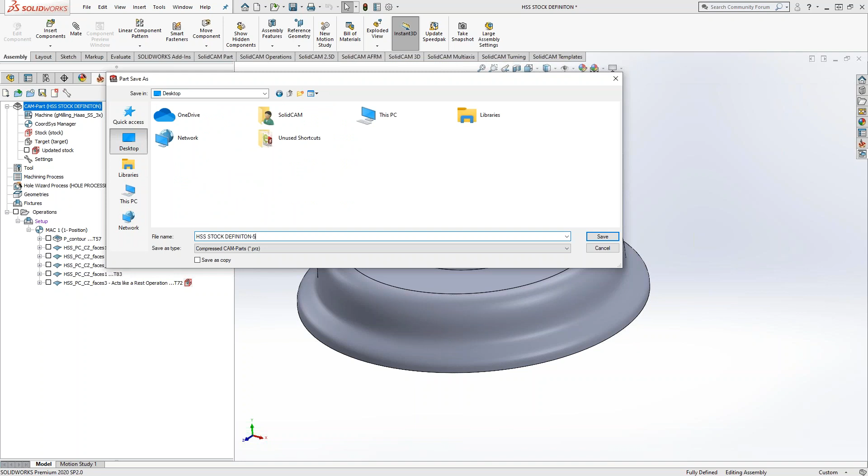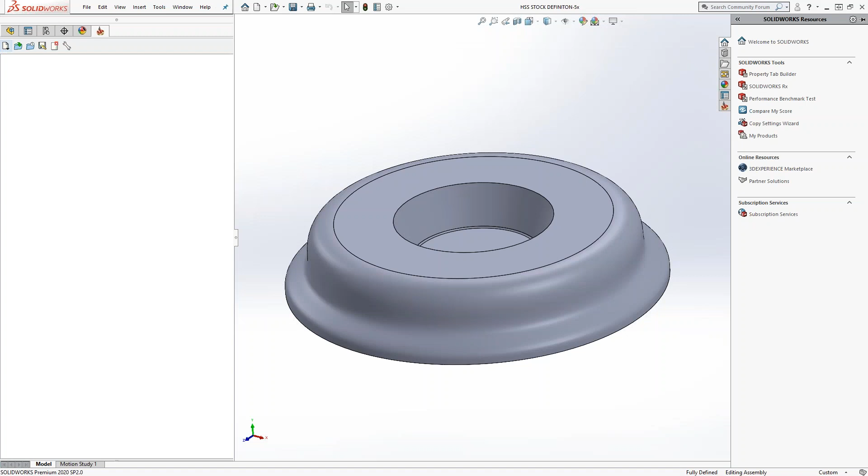So this is the one that we're going to put on the 5-axis machine. So this will close this original one. It's working its way on it, but it should be closing the original one and opening it as, in this case, HSS stock definition -5x. We'll see that on the top of the screen. But this is the same file, essentially, just renamed. So the same CAD cam part model reference, the same toolpath, same tool table, even the same stock as you see there. But it does have the new name.

Now, what we'll do is first, we'll change the post. So double click on cam part. And let's change it to a 5-axis post. I think we've got one of the basic ones that come with the software, the Haas 5x. Now, when you change post, even if it's not from 3-axis to 5-axis, you're always going to get this message saying you're basically changing the references of everything. This post is going to have some different functionality. So do you want to save a copy of your original one, or do you want to just continue?

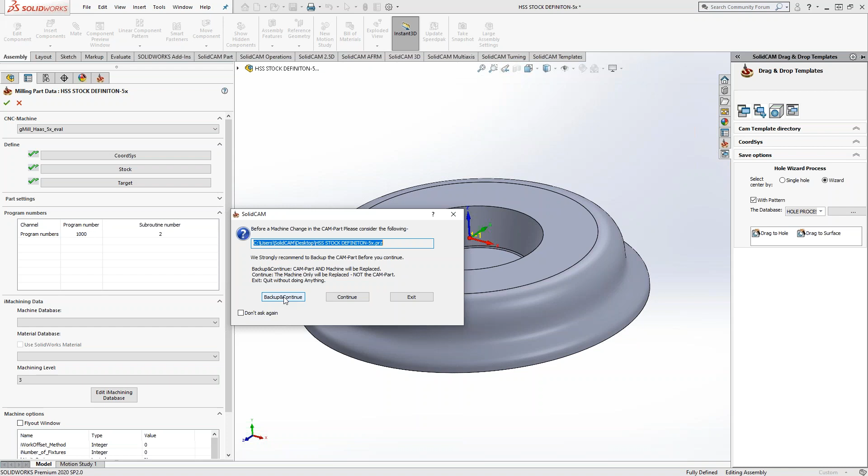Now, this is a copy of that original file, so I'm okay to say continue. I'm just going to change this post in this one file, and the 3-axis one stayed the same, so we don't have to worry about that. And then it just shows you what's different. I'll just say okay, and there we go.

Now, when you change the post, remember that there's two files there. There's the GPP and the VMID, and the VMID is the definition of the limits of your machine. So if we're working on a completely different machine, you might need to change your iMachining definitions. So keep that in mind as well. But in this case, we're not using iMachining.

So save as, and if I want to keep the same work done by the 3-axis operations there, but I don't want to actually have to repost them every time, what I can do is I can suppress them. But remember from what we said last week, when you suppress something, you're actually removing it from consideration. So if we still want to update the stock, we just don't want to G-code it.

There's actually, right below suppress, something that says suppress G-code. And essentially, if you take a look at it, you get these boxes around your toolpaths there. I can't actually G-code them. G-code is grayed out, but it does still update the stock. So I can still see the updated stock there.

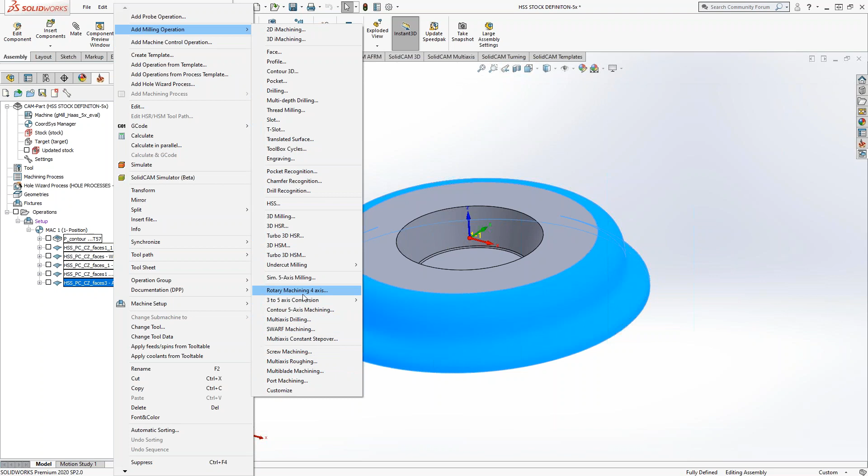So this is almost like stage 2 in the part production life. It was on a 3-axis machine. We're bringing over that stock. We're bringing over these toolpaths. We're just not doing them over again. This is another way to retain that stock definition when you go from one machine to another. And then from there, you can add your 5-axis toolpaths. You can see they're all open now that I've chosen a 5-axis post.

But let's say I wasn't ready to do that, or I've made something on the part and I don't want to save it. There is actually a way to close out of the file without saving. You can basically right-click, and instead of just close, added now, and I believe it's 2020, is close without save. So close without save is still a way to properly close the file. It's not going to get stuck in the temporary folder like it usually does when you click the X in the top right corner, but it is a way to close it without saving the most recent change. And that's actually new in 2020.

Yeah, and anytime you guys close out of a part, you save and calculate something, everything is getting written to that temporary folder. And now if you do have a whoops in there, instead of going into your task manager and killing the program so it doesn't save, you do it that exact way that Mark was just showing you guys.

Yep. Now it's still saving up to the point of when you open up the file. So it's not like you can save at a certain point and then close and not save the most recent change. Correct me if I'm wrong, Kevin, but I think it's basically you're closing it properly without saving, but it only saves to the point before you opened it up. Correct. Yeah, so there's still that drawback of the whole temporary folder versus compressed folder issue, but at least this way you're not crashing it, you're not causing it to stay stuck in the temporary folder, which can lead to issues.

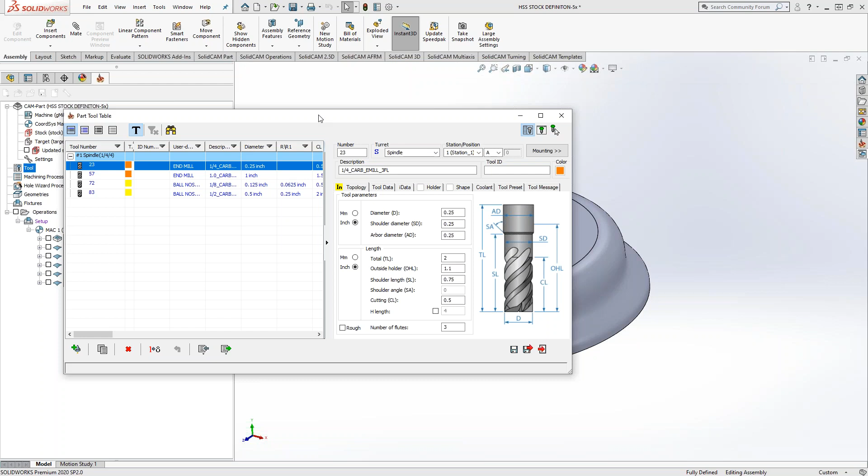Okay, one of the other questions that was left over was, what is synchronize and what is break associativity? And I think that question was relating to this submenu here. So you have check synchronization, synchronize and calculate, and break associativity. Real simple, this is the idea that every toolpath you program is tied into a piece of geometry, and that piece of geometry is tied into an ID number or some sort of identification from SOLIDWORKS.

So the way the associativity works is in the original part file you got from SOLIDWORKS, every face, every edge has an ID number. And that ID number is what we refer to when we select the geometries inside SolidCAM. So if there's a change on the SOLIDWORKS side, that change gets incorporated into the SolidCAM side of things, into your CAM part model, and then your toolpath will update to the new version of that geometry. It's a larger hole or a different hole location, whatever the change was. So that's associativity.

Let's say, though, that this is a Rev 1, and now you have a Rev 2, but you don't want to overwrite your Rev 1. Well, just like we saw with the Save As, you can make a Save As version of your file, and then in that Save As version, click on Break Associativity.

That way, all the toolpaths, all the geometry, the design model itself has now broken associativity. It will now not update versus the new version of the file in SOLIDWORKS. So it's the opposite of what you're trying to do with some of this integration. You've got a Rev 1, you don't want it to update, you want it to stay Rev 1 forever. Click on Break Associativity, and that toolpath will never update when it sees an update on the SolidWorks side. It actually won't even bother to check anymore.

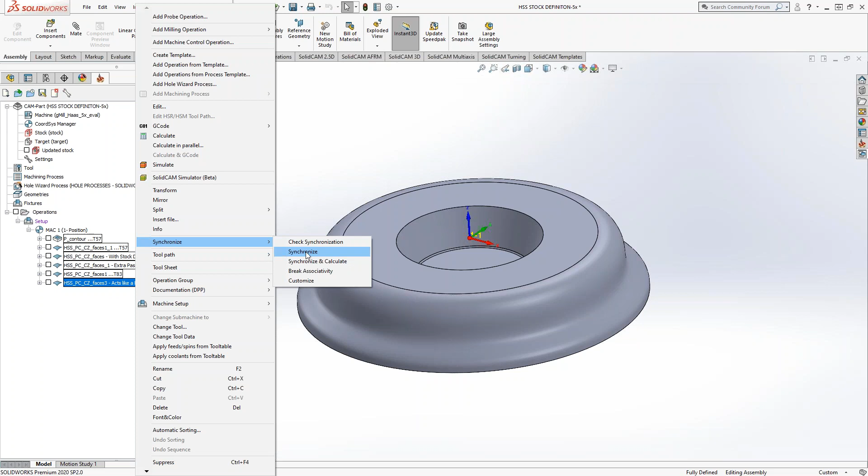And since we're kind of on the check synchronization and synchronize, you can also do this with your target and your stock models as well. You can do a check synchronization and synchronize too. So depending on how you have your settings, if you have your synchronization settings to user demand, and Mark goes and makes a change in here, we basically want to go and just do a check synchronization real quick.

And the check synchronization on user demand most of the time will pop up with the stoplights on the stock or the target or the operation that needs to be synchronized. So it's just letting you know what has changed. But in a very rare instance, they may not pop up for your stock and your target if you make a change. And that's only if you're making the change inside of the SolidCAM model itself.

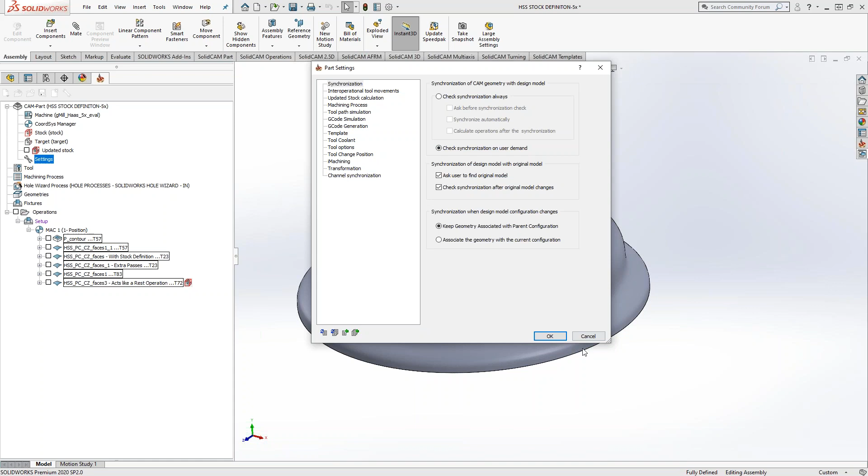So if Mark went into the SolidCAM tab and made a change to the model instead of just SolidWorks alone, sometimes it just takes a little bit longer to synchronize that. If Mark wanted to see that change instantly and update his target and his stock to go with that new change, he can come up to the top and do check synchronization and do the synchronize right there as well.

And if anything is out of sync, it will pop up with the stoplight, or I guess it's not really a stoplight, but it's a red-green. You want to show them that icon at the top, Mark? The SolidWorks stop. Oh yeah, it looks like that. It will look just like that for you. It's the same icon, but it'll be overlapping your icons over here. So any one of these toolpaths that has geometry that needs to be resynchronized, or if your stock and target need to be resynchronized, it's a very similar symbol that just overlaps that symbol there.

And very similar to what we talked about last week, Kevin was talking about if you hit this plus sign, it actually shows you what needs to be resynchronized. So let's say in this HSS toolpath, it was only whatever faces were selected under faces 2 that need to be resynchronized. With this collapsed, I would see the stoplight symbol right next to that HSS symbol. But if I click on the plus sign, I would see the HSS faces selection there with the stoplight symbol indicating that's the thing that needs to be resynchronized. And when you expand it, you can right click on it and do the check synchronization and synchronize as well.

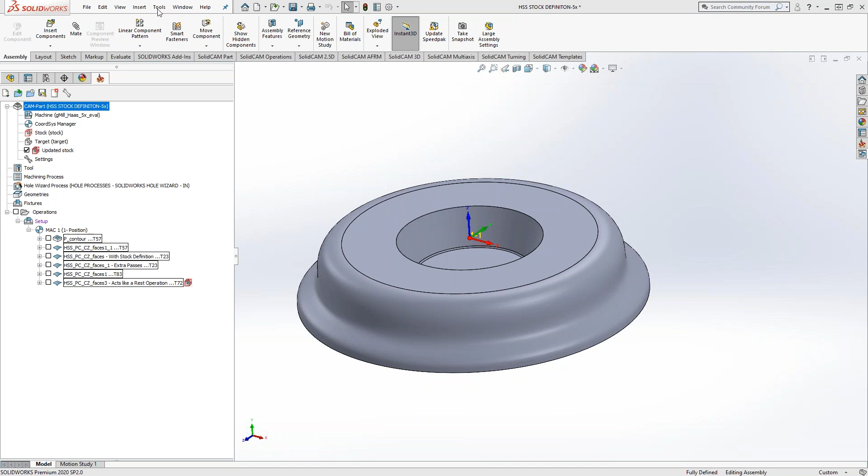But so basically, Frank's question is he's got a cylinder with a flat on it. And because of some of the things that SolidCAM does, some of the things that are just kind of generic for CAM programming in general, there was something that was overcutting on his part. Basically, he's got a part that's probably not this one, but it's very similar: basically just a square shape or a couple of flats or even a hex on a cylinder or a bar stock.

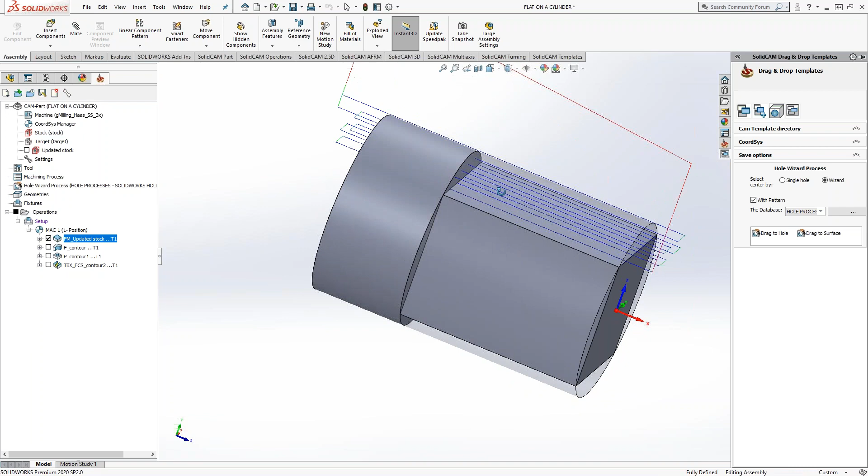And if you use the facing operation, remember that facing considers whatever surface you click on as the top face of the part. Basically, it's open on all sides. It's almost like a pocket that's open on all sides. So if you use the facing operation, it's going to think that you want to machine all that stock. And that's why it's crashing into the back there.

So I would not use face. I would not even use face if you don't even have a back end, but you don't want to cross this back line here, because again, facing considers all edges to be open. That's why there isn't really an option to set an open edge versus a closed edge inside facing. So what you would do with this is you can use either the profile operation, the pocketing operation, or there is actually a toolbox cycle specific to flat on a cylinder. So let's go through each one and see how you can use it.

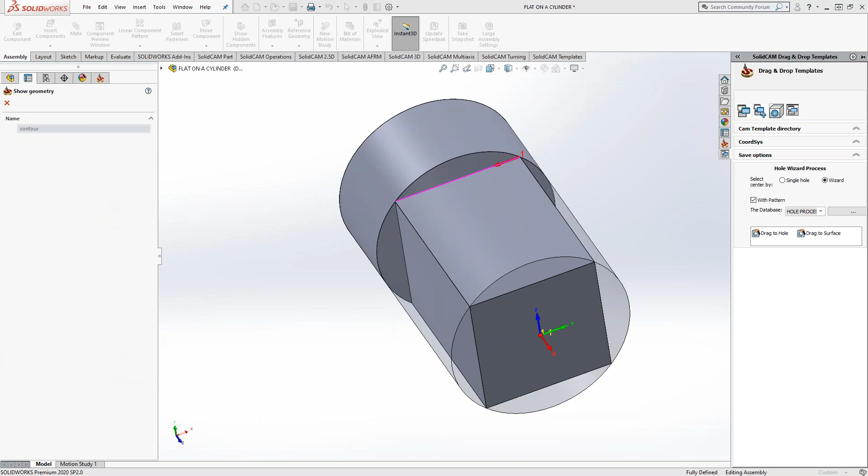So in terms of the profile operation, what I've chosen is just that back line. Now that back line on this part just happens to be right on the edges of that cylinder, but it could also be the flat on a hex that is a little more inside the cylinder. It really doesn't matter, because in the profile toolpath, you have the ability to do extensions. So if this thing was not right at the edge of the stock and I should have extended it a little bit more, always remember that you can do an extension inside of this window here. And that can be found in the technology section, geometry button. But in this case, this chain is right on the edges, so I don't have to do any extensions.

The tool, in this case, I've chosen a 1/2" end mill. Levels, because of the stock recognition, or even just if I just chose it, I can do top of target, top of stock, and then the same with this one. I actually clicked on that top face and got that associativity. So again, a level of associativity just by clicking on the geometry. If I wanted to break associativity, I could just type in the number. But it basically means the same thing in this file. It's just that the associativity would follow that face.

So if I change the shape of the square or the shape of my stock or anything like that, the associativity will follow that face, versus if I put that number in there, it'll always go to, in this case, 290 thou below whatever I've chosen as my upper level. So that's just another level of associativity there. But basically what I'm showing you here is in the profile toolpath, you have the ability to go from the top of stock or top of target down to whatever face.

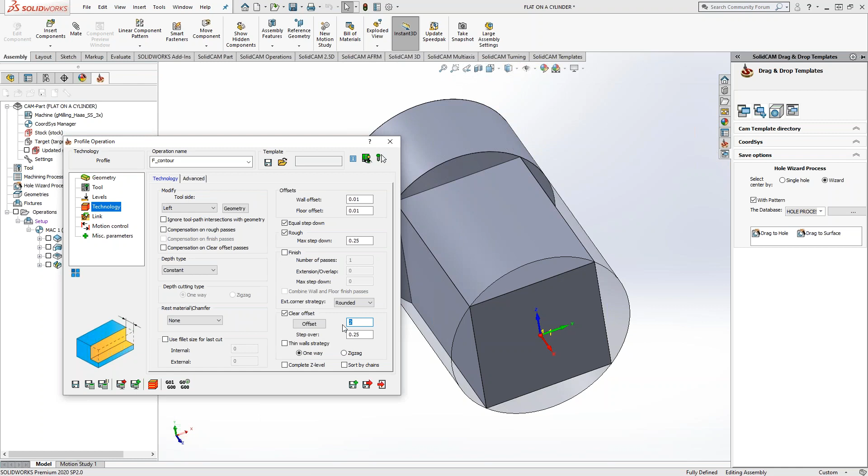So to set that, I chose offset and I chose this face. It's recording these coordinates, but really what it's doing is finding the distance between my chain and that point. So that's the 2 inches that this thing is, right? And then here's my step over. So similar to what you do in pocketing or similar to what you do in HSS, anytime you have a step over, a radial step over, that's this value here, and then this is the travel across there.

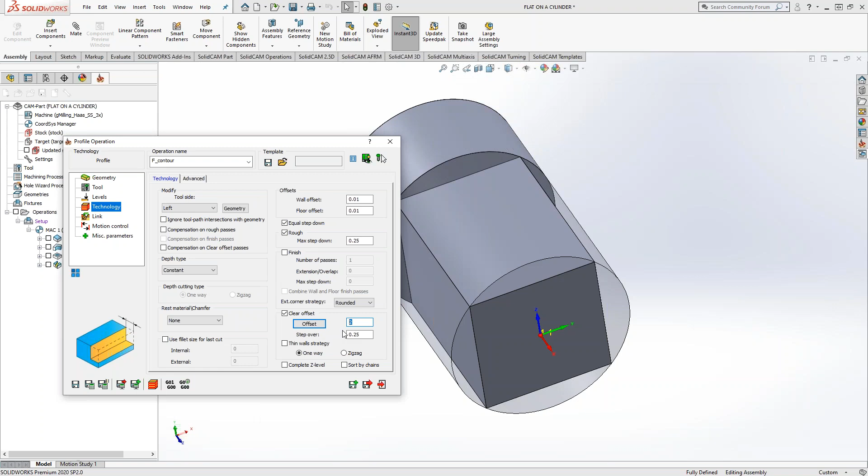So there's nothing associative about this. There's nothing pocketing related about this. This is simply, here's how much material I have to travel across, and here's the steps across it. And what that does is it generates a toolpath that looks like this. So it's still a profile toolpath. It's going to do one path, retract, reposition to do the next path because I told it to do it one way. But you can see I've got my depths of cut.

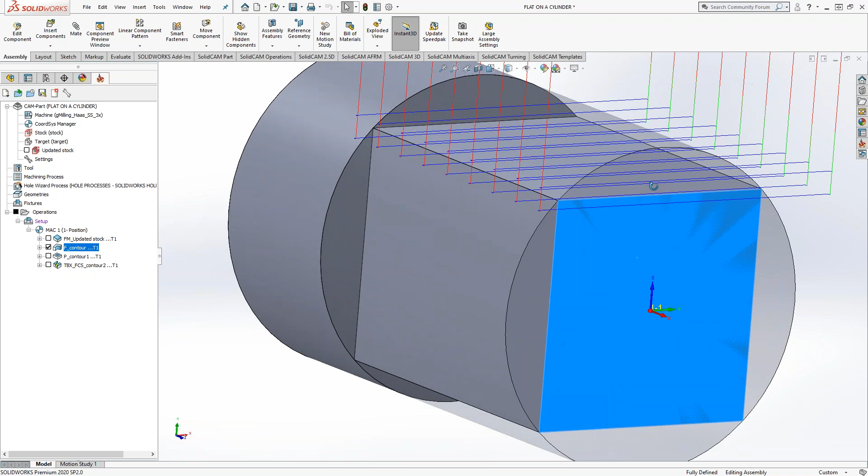Let me just get a front view of this thing. I've got my depths of cut and I've got my step overs, and that does all of that. And because I chose this back wall, this line here as my wall, it's going to go up to that point and that's it. So I don't have to worry about colliding or over traveling or anything like that. So that's one way to do it.

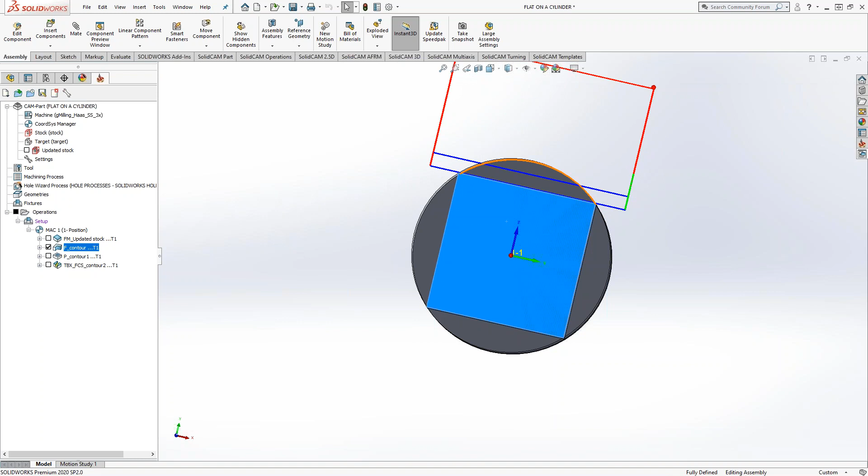The drawback of that though is you can see that it's not paying attention to the fact that there's curvature there. So it's actually cutting the air over here, because that curvature means there's not that much material versus down there. So I want to trim that a little bit. So I'm going to jump right to the toolbox cycle because you program it exactly the same way. So if we take a look, my geometry is that back line. I got to that because I used flat on a cylinder, which is one of the toolbox cycles. My tool is the same, my levels exactly the same, top of target down to that face.

In the technology section, for a flat on a cylinder, I'm doing the exact same thing. I'm giving it my clear offset, how much I'd like to step over. I'm giving it my step down. It's going to generate it very similar to a profile toolpath, but in this case, I can tell it to go along or across, depending on how I'd like to go across that surface. Wall offset, floor offset, extension, because it kind of imagines I probably want to go off the cylinder a little bit. This is where you can actually do that extension very similar to what we saw in profile. I can tell it to go a little off the sides if I need to, because maybe that one line doesn't represent the entire flat.

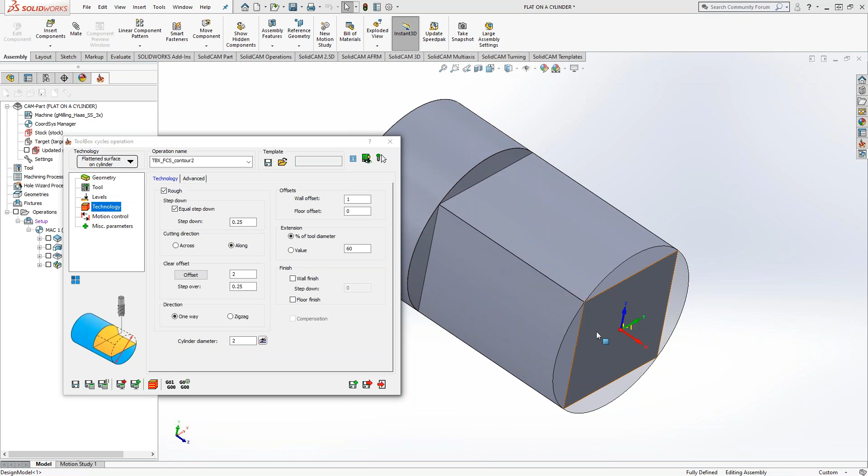But dissimilar from that is the fact that it now can recognize that it's on a cylinder. So I can actually give it the diameter of that cylinder. So it'll recognize for my levels where on the cylinder this thing is sitting, so that when I take it from the front view, it actually trims it a little bit. I'm not sure if you can see that there.

How do you get to the toolbox cycles? If you right click and go to add milling operation, toolbox cycles is right there. If you go from your menus up here, I believe it is 2.5D? Yep, so toolbox cycles. If you go to the 2.5D tab, it is over here. So it's just another one of the operations in the list. But basically, the toolbox cycles are bare bones versions of Pocket and Profile. So you'll get it for certain features.

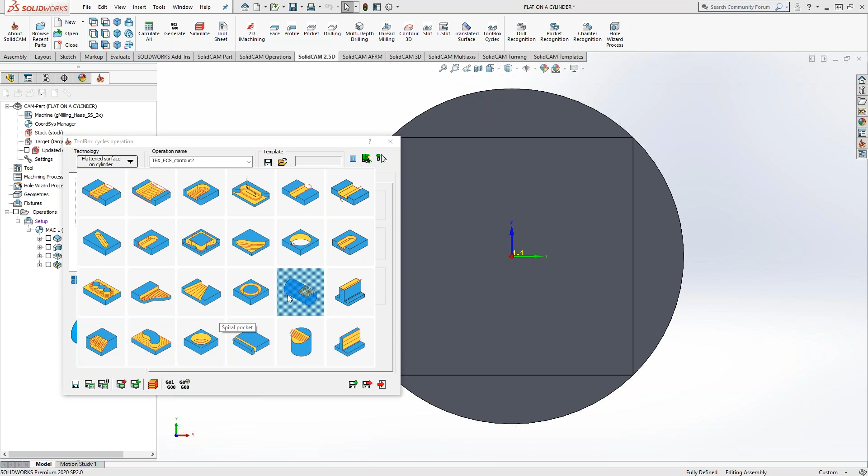If we just open up this toolbox cycle once again, anything that is very similar to what you see in these images, you can do a very bare bones, very minimal parameter selection for some of these. And a lot of these are very unique, but the flat on cylinder is one that I find a lot of people who don't have a 3D toolpath will use, because this is a really great way to get a trimmed, almost 3D-like toolpath when you don't even have the 3D package.

Yeah, and there's a lot of very powerful tools in there too, and maybe sometime we can go over all those Toolbox Cycles, because like Frank and probably a lot of you guys in here, you guys have never seen the Toolbox Cycles before. So a lot of powerful tools in there that really simplifies things for you.

Well, I would say if they've been watching the videos, they will have seen Toolbox Cycles, because there's been at least 2 or 3 Kev cams on there. So definitely it's something that has been seen.

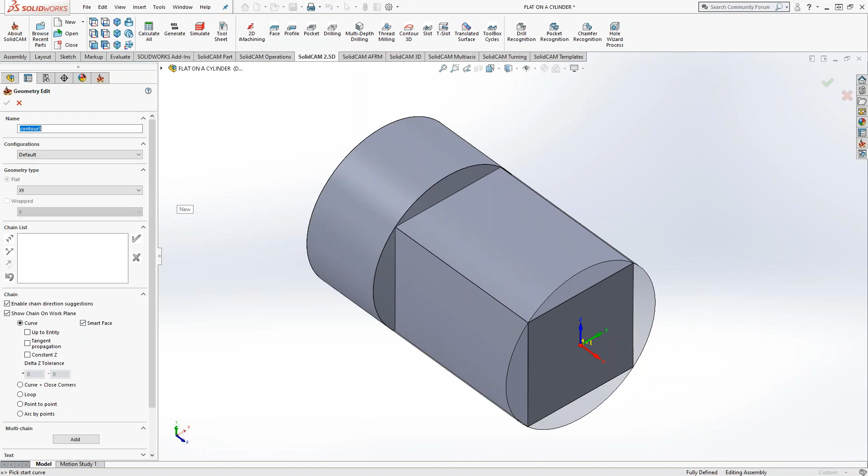Okay, and then if you don't use Profile, you don't use Toolbox Cycles, you can still use Pocket as well. Because again, if you consider this to be a pocket that's open on all 3 sides, when I click New, I can use my smart face. I can click on that face there, and it gives me a pocket that has 1 wall and 3 sides.

And then from there, you're doing the exact same thing. You're choosing your tool, your levels, your technology. In this case, I have it set to contour, open pocket, approach from outside. We get a toolpath that looks like this.

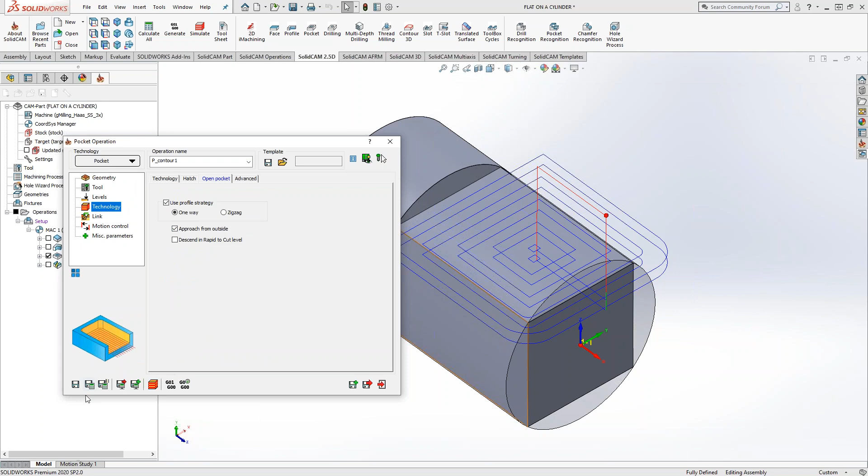If you want it to look almost the same as what we did with the profile, then I can switch this to hatch. I can get it to be, let's say, 90 degrees to the x-axis. And we can use profile style strategy. And then we get something that's exactly the same. Now, this versus just regular profile, the difference is I've defined the shape of my pocket.

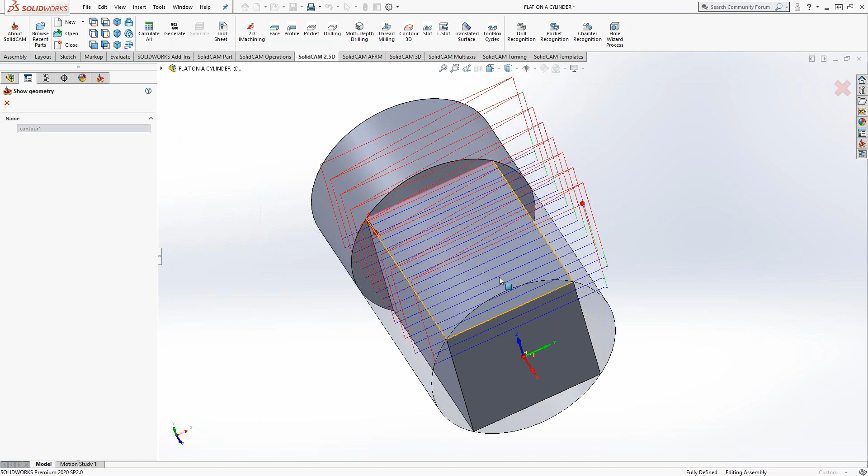And there's actually a tip and trick video on the YouTube channel for this as well. If I didn't have a nice clear offset where the chain was the same on both ends, if I had maybe some sort of triangular shape or anything like that, then the pocket toolpath using the profile style actually trims the toolpath in this direction. So if we had a unique shape like this, the pocket would dictate the travel of the tool as well. So it would actually trim it in the XY plane.

But with pocketing, you get the same issue as we had with profile. It's not trimming it to the curvature of the cylinder.

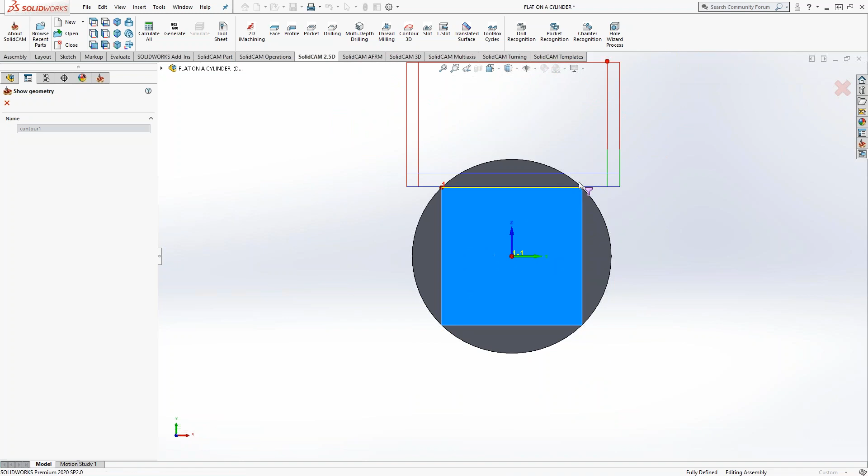Now, we could take it one step even further, since we were just talking about this on Friday, in HSS, the stock definition as well. You could set it up as an HSS operation. We could do that as well, yeah. Now, HSS, I wouldn't usually use it for roughing like we talked about on Friday, but Kevin's right. We could do the exact same thing.

So let's say we do parallel cuts linear. As my drive surface, it's that guy right there. I always set this to this option here so we can use the tool as much as possible on that surface. The value from X is also 90 degrees. If we're doing this as roughing, we can leave some material on that face as well.

Go to Tool, select the same tool. Levels, we can set it to automatic, or we can just leave it as plain. Again, this is just the clearance plane. Toolpath parameters, we're using a flat end mill and we're doing it on a flat surface, so my step over can be exactly what I want to step with.

We can do one way as well, just to make it very similar to the profile. We'll do it as one way. Tool control, nothing really here to control. Links, same as before, we can retract to the clearance area. We're going to make this look almost exactly the same as the profile.

The only thing you'll have to do different here is, now that I've told it I want to machine this surface and I've told it I want to take the tool right to the edges, it actually is going to go right to the edges. So if it collides with this wall, I need to account for that.

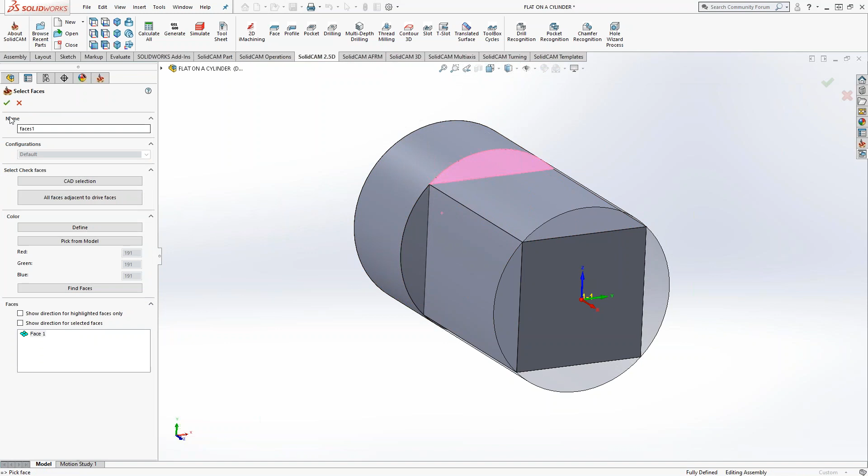So in the gouge check, I'll include that. I'll say check the tool tip and the tool shaft, trim the tool path in case of a collision, and my check surface will be that surface right there. It still considers this to be a wall, so I just have to choose it as that wall.

We'll get a toolpath that looks almost the same, except in this case it's not starting from the outermost point and going towards my edge, it's starting from there. But if I don't like that, I can always go to flip step over, and now it starts from that side.

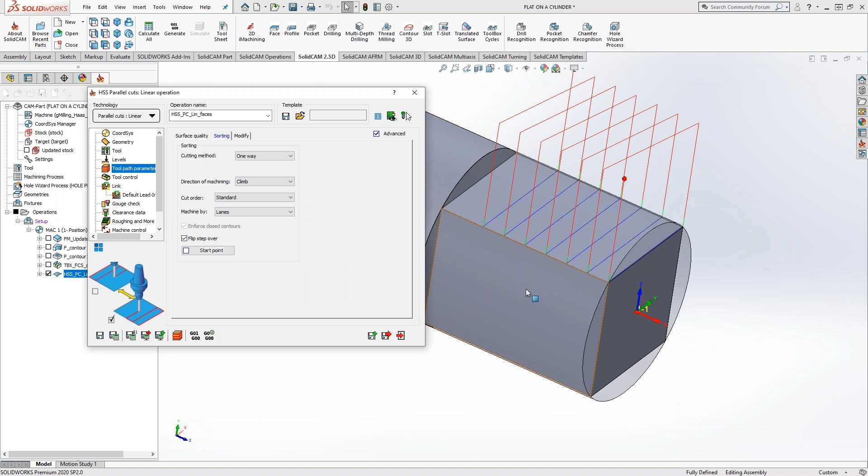And then you can, if I need my depth of cut, yeah, you can do Roughing and More.

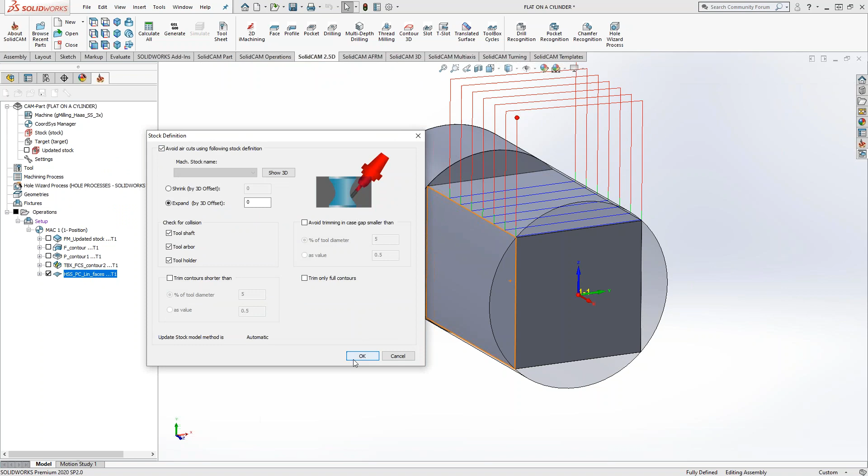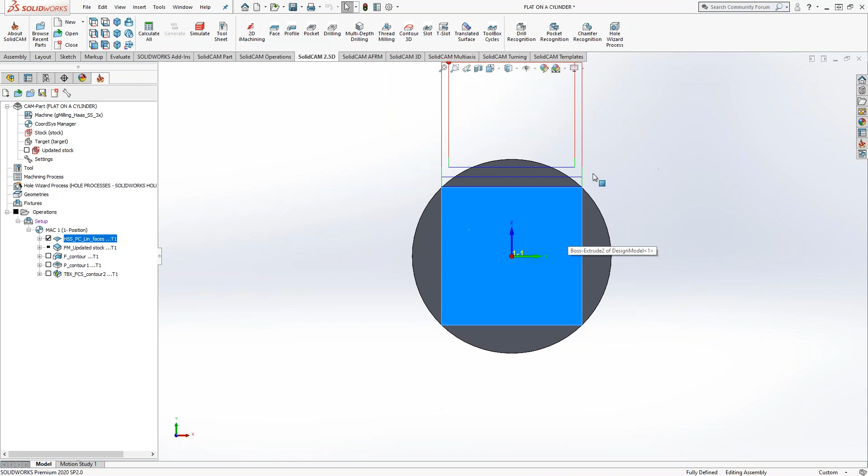This toolpath should look identical to the Toolbox Cycles, but this is a great point to show right now: look at all the input Mark is having to put in to get this to adapt to the cylinder stock. That's why the Toolbox Cycles operation is very powerful and right in the 2D — all Mark had to do was click on the face, tell it what size diameter, and it automatically adjusted for it that way as well.

So I'm going to put a lot more steps, tinier steps, just so we can see the curvature of the toolpath. Let's say we put in 10 steps of 30 thou, just so we can see a lot of lines of code and see the curvature. But you can see the curvature ends right there because there's no material to be removed — the stock definition trimmed the toolpath at that point.